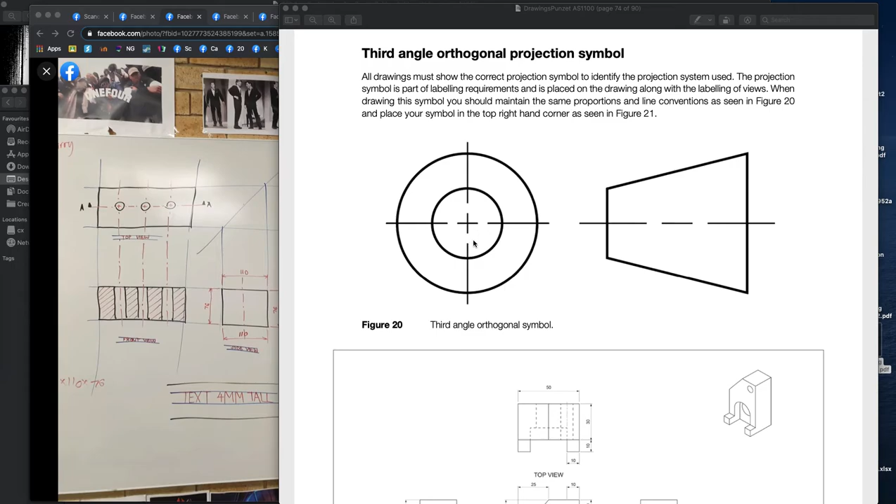First thing I wanted to talk about is the third angle projection symbol, which looks like this. Like I said, I consider this a target and a flag. The actual idea is it's a cone shown, and to show that it's a cone, we have to include these lines here. We're going to talk about those lines in a second. They're called center lines, which I guess brings us back to line weights. And there are two line weights. There's thick dark and thin dark lines.

We might draw lines initially as what we call construction lines. They should be drawn with a 2H pencil. Now, when I was going through high school and uni, I always just used the same mechanical pencil for all my drawings. I was lazy, and I never used a sharpened HB, and I never used a sharpened 2H. If I wanted to draw a construction line, like my working out lines, my lines that I'm going to use to start off with, I would just draw very lightly on the paper.

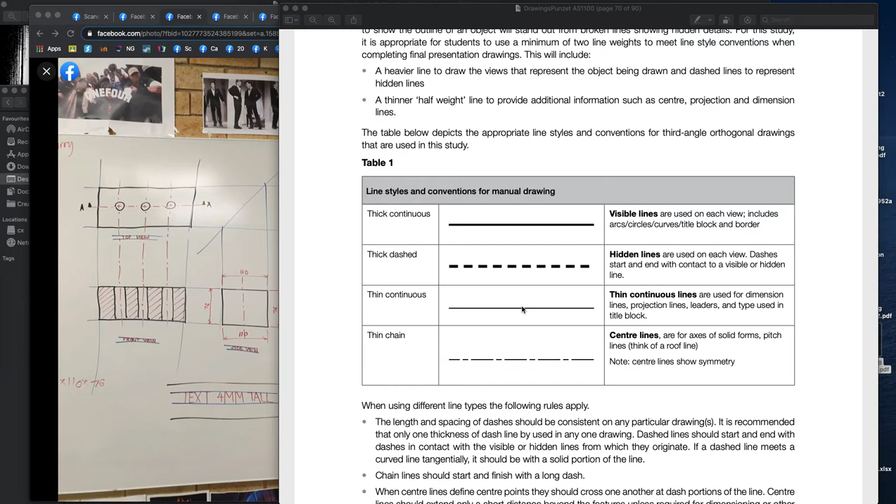And if I wanted a thin line, I would hold my pencil at a very steep angle, like a 45-degree angle or lower, and just use the corner of the mechanical pencil. And if I wanted a thick dark line, I'd hold the pencil flat. So you can see this drawing here shows the difference: holding the pencil flat, we get the full 0.5 millimeter. Whereas if we hold it on the side, initially we're going to get a very thin line, but as time goes on, we'll get a wide line. So just looking at your pencil and seeing how the graphite is moving away was how I controlled it without having to use multiple pencils.

The official thing that I recommended in the previous video is that where I've drawn blue lines here, my very light lines, that should be done with a 2H pencil that should be sharpened. The thick dark lines that I've shown here in black should be done with a mechanical pencil that's 0.5. Now, I did look in the Australian Standard. I can't find anything that specifies 0.5. I will just tell you that that's what I was taught, and I don't think you're going to go wrong in the HSC if you use 0.5.

Then you're going to have to use thin dark lines, and you're going to use thin dark lines for things like center lines, for dimensioning, and for hatching or sectioning, which you can see there. And in this drawing, I've used red. For that, you should be using a sharpened HB pencil, or if you're like me, you can just use the edge of your mechanical pencil.

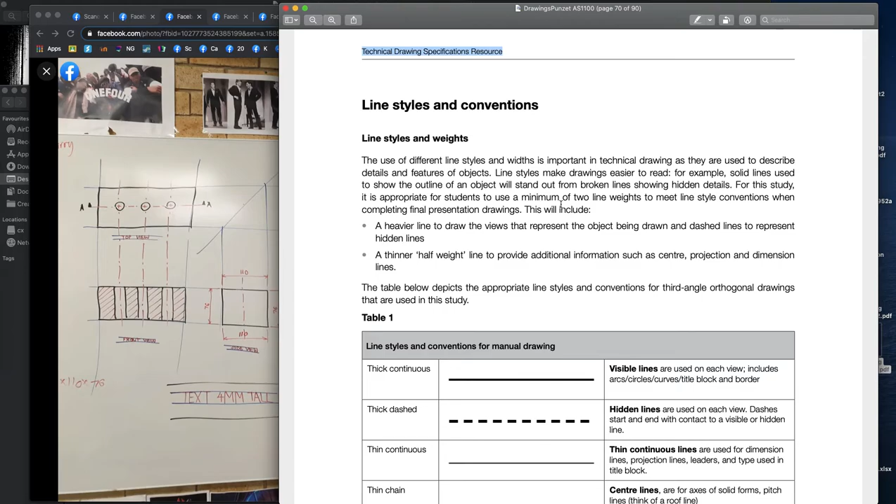So let's go back to the standard. Now, this is the VCE, the Victorian equivalent of the HSC. Their document, anyway, is a pretty good document, and they talk about 4 different line types. The thick dark lines, which you can see here, I've drawn as a black line on the whiteboard. The thick dashed lines. Now, I don't have any thick dashed lines there, hidden detail, but if I was drawing hidden detail, it would be in the same black line.

Then we've got thin continuous, which is used for dimension lines, which you can see I've done in red, and also for section lines and for sectioning and hatching. And then we have the thin chain. The thin chain is what we use for center lines. So that's a long dash, short dash, long dash, short dash. And what that does is it shows that something is circular or cylindrical.

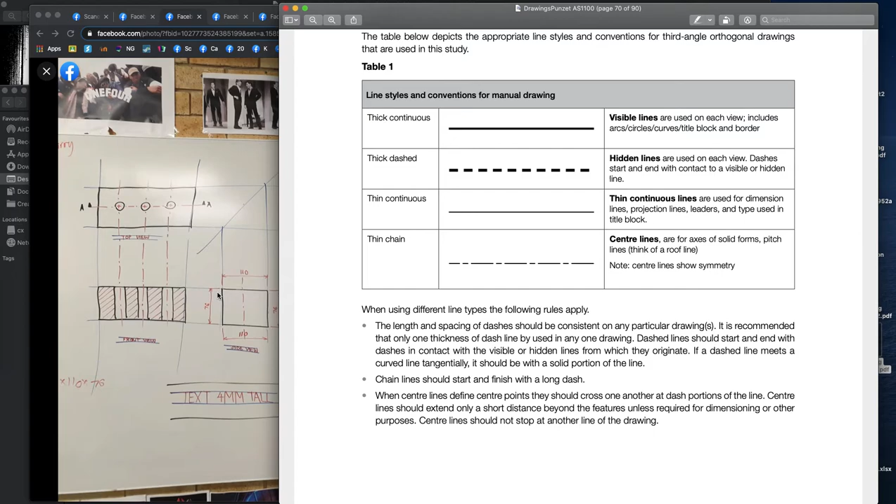So we use that a lot so that when we look at this sideways, we don't think that it's a rectangular shape. We show that it's cylindrical by having a center line on it. And that's how we indicate that in our drawings. And that's very important. Maybe not in the HSC, but you'll definitely lose marks with me if you don't include center lines.

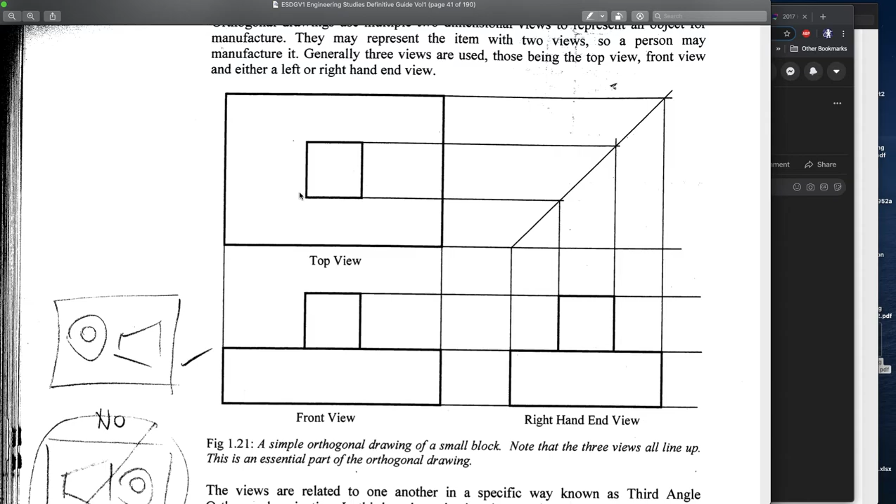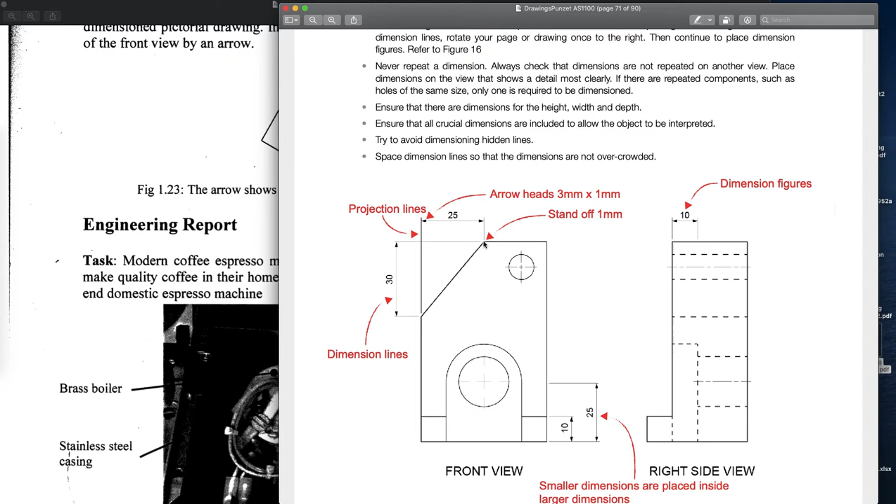Now, the reality is it's hard to draw a solid shape on paper when we're drawing with pencil. So instead we just draw the outside. We don't fill in the arrow. There's also what we call the standoff, the gap between the dimension line and the object. That should be 1 millimeter. And then we also have little lines that extend past, and I think they should be 2 millimeters past the dimension.

The other thing that is really important is that when we're drawing our dimensions, the dimensions are always written above the line and to the left. Can you see how this is written above the line and to the left of the line? And this one is also written above the line and to the left. A lot of people want to write the dimension here, but if you write the 10 here, it could be confusing as to whether the 10 is here or here, especially if you're reading on a wet day, you're running late, people are running out of money and very cranky. It can be very easy to make those sorts of mistakes.

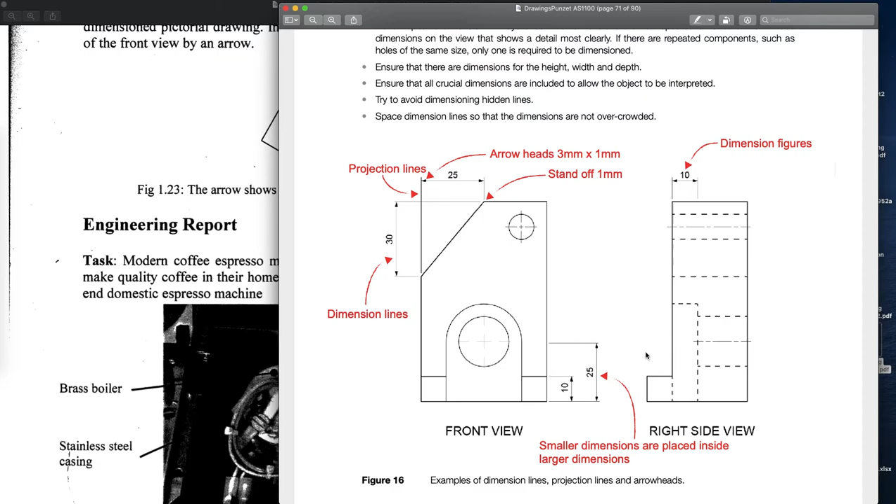This is really critical for the drawings that you do for me in your civil engineering report at the end of the year: it's important that you round off to the nearest millimeter. Unless you are specifying something with greater accuracy, like a space shuttle where you've got a tolerance of 1/10 of a millimeter, we always show all dimensions in whole millimeters. Unless we specify otherwise, all dimensions are in millimeters, never meters or centimeters or anything else.

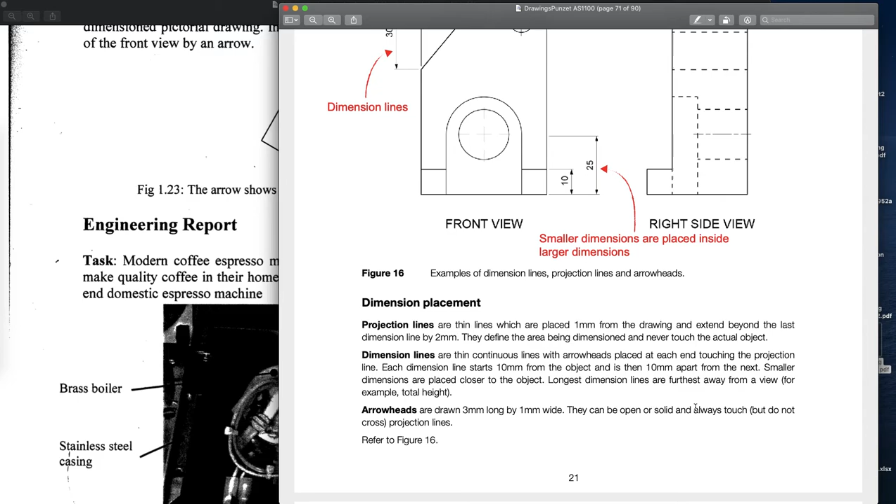Okay. So the arrowheads can be open or solid, and always touch but do not cross the projection lines. These lines here are called the projection lines. In other videos, I've talked about how engineers in actual practice might be lazier when drawing sketches, but this is for official drawings and this is the standard you should be working to.

For circles, it's a little bit more complicated, but here we can see the hidden detail lines are thick, dark, dashed lines. That shows the viewer that there's a recess here, and then a circle running through that space. We can tell this area is circular because it's got a center line, a thin dark chain line, long, short, long, short. That shows us that this is circular and not a rectangular cutout.

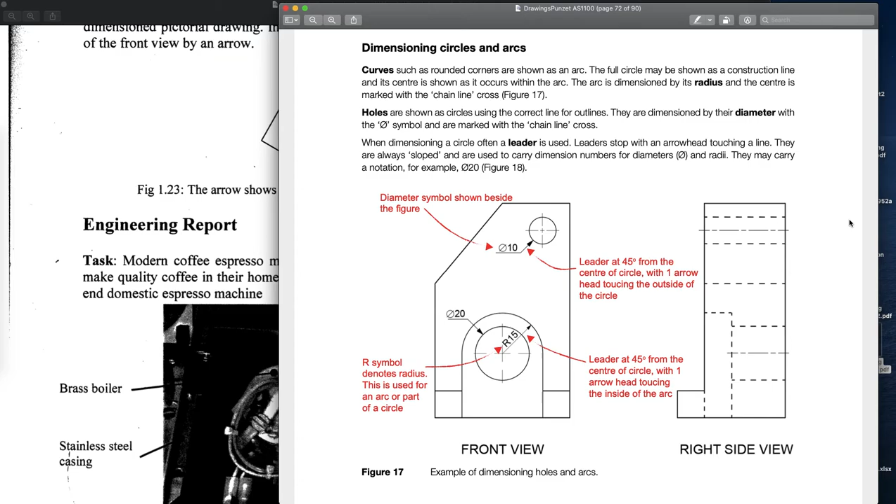Okay, so I'm not going to go into dimensioning of circles at the moment. I'm going to move this and go to some drawings. Here we have some drawings. What I'm showing here is don't ever write your dimensions on this side of the line. That would not be to the left. Like Beyonce says, to the left, all of your dimensions to the left of the line. You can see that in this shape here, I've written above the line in both cases and to the left of the line.

Okay, so I was saying how engineers often draw their arrows just as a slash at 45 degrees. Yes, you can do that if you're an engineer doing a quick sketch and handing it over to someone else to draft officially, but you would not be allowed to use that when handing over formal drawings to your client.

Your formal drawings will have to be done as a correct arrow, which is 3 and then 1 millimeter wide. It's important to remember that.

So how a lot of people draw this is they start at where the dimension line meets the projection line, and then they draw out. And by drawing out, they often get a curve that goes this way, and that's probably more correct. If you had to take a guess, a lot of people, when they start learning, they draw like this, and that's probably not ideal. You're better off taking it in from where they meet and then taking it out.

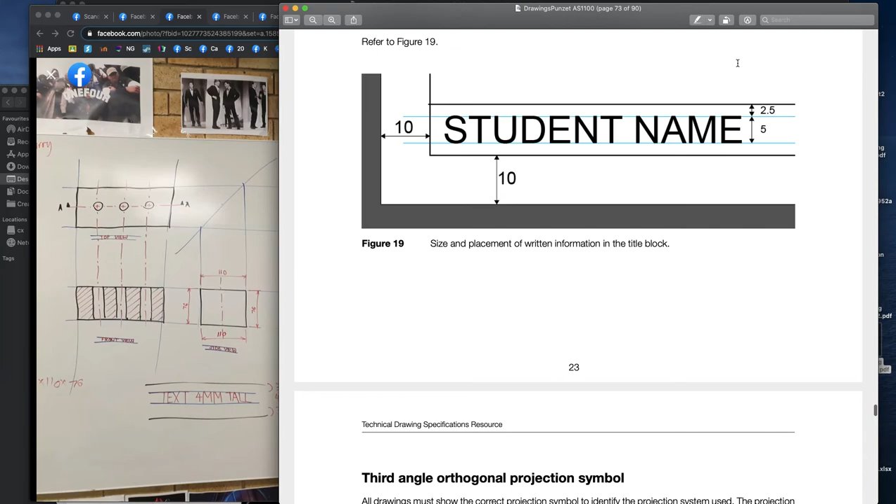So the AS1100 does specify text. If you can see here, the VCE says that your title blocks should be 5 millimeters tall, and I agree with that. We'll have a look at that in the AS1100.

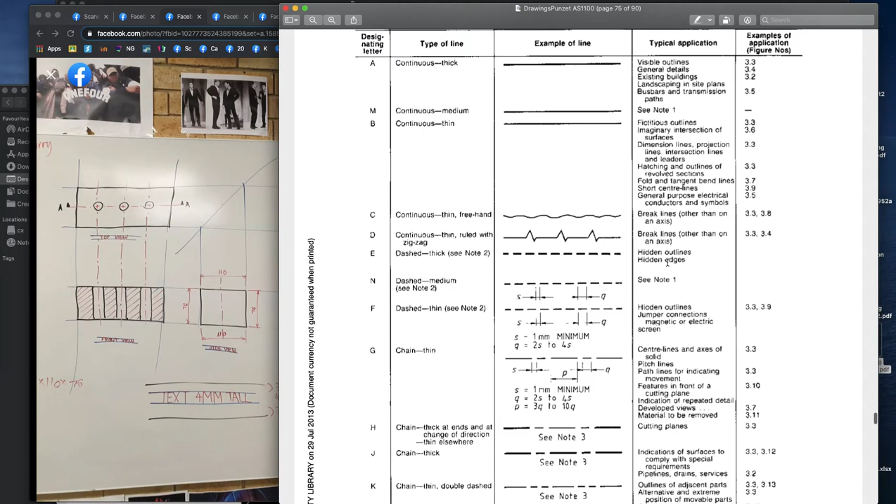We've now switched over to the AS1100, and it specifies different line types and where they should be used, and it shows how you should draw your thin dark lines, your dashed lines, and your chains. They specify minimums so that the spacing should be at least 1 millimeter, and your thin dash should actually be more than a dot. Sometimes I just draw a dot, and you shouldn't. It really should be 2 millimeters. But anyway, we're going to go on.

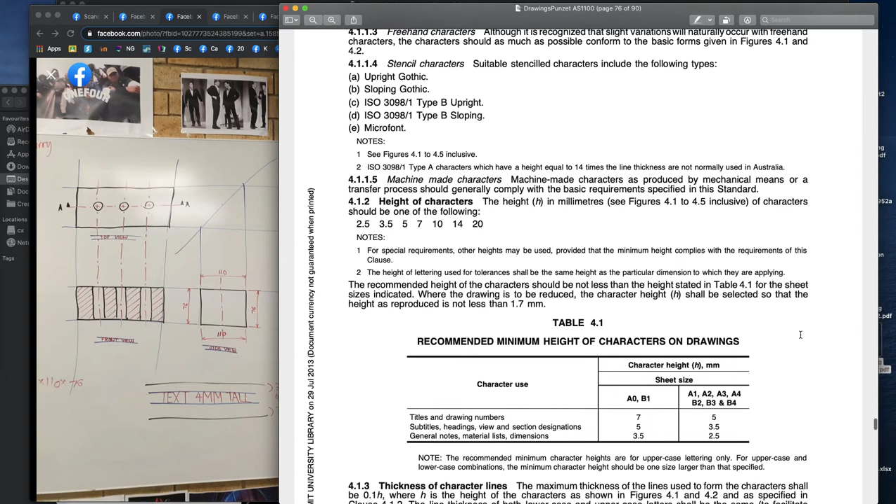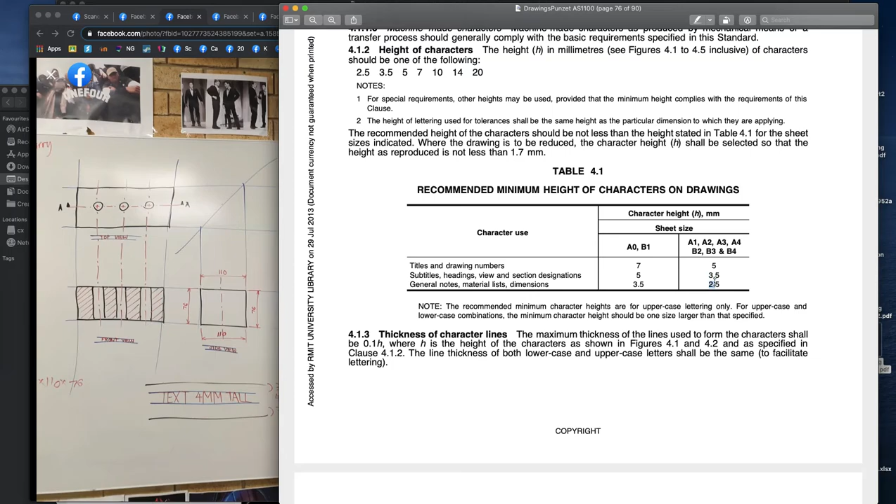The sizes of your text: if you're drawing on an A4 piece of paper, your titles should be 5 millimeters. Your subtitles should be 3.5 millimeters, and your general notes, materials lists and dimensions should be 2.5 millimeters. So that's the AS1100 for sizes. That said, if you did everything to 4 millimeters, I'm going to give that to you correct in the HSC. I think it's better to know what the right thing is, and then you can ignore it.

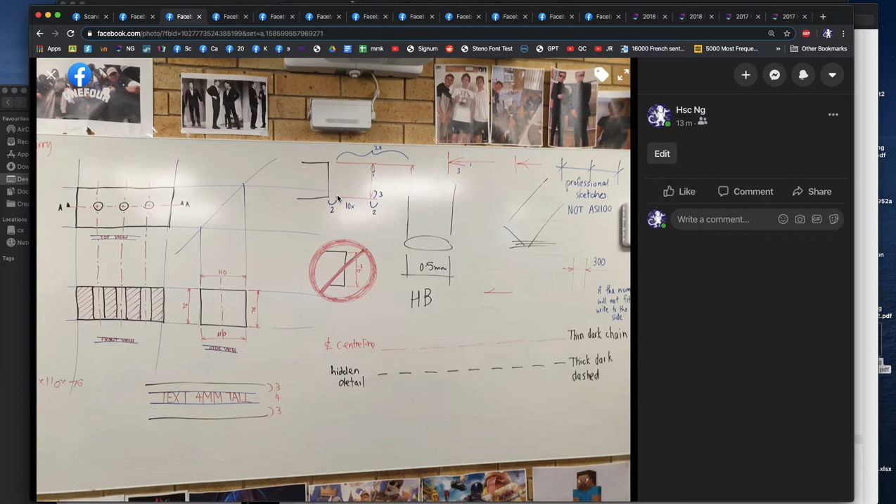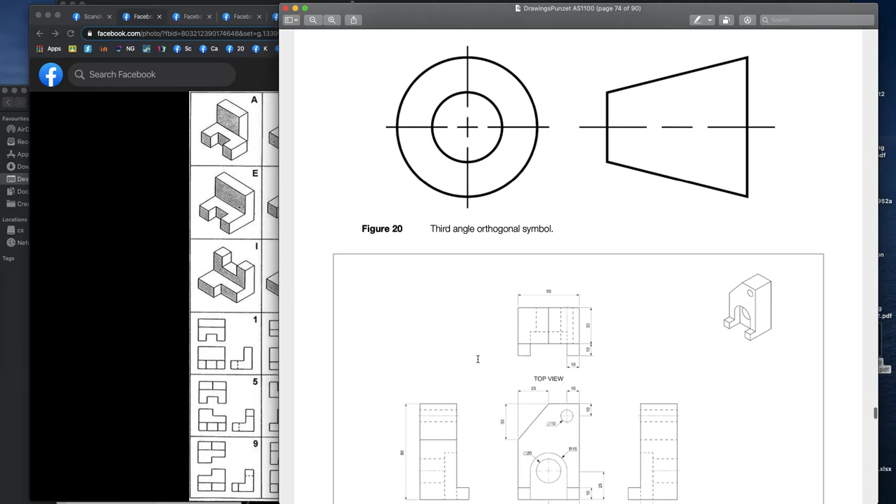Okay, so now that we've talked about hidden detail, we can go back up to here and look at this document. Okay, so we've talked about dimensioning. So the next thing to talk about is, do we want to, yeah, okay. I'll talk about circles in a second.

While we're talking about hidden detail, we can see the importance of hidden detail and being able to identify our drawings here. So if I ask you to find match 1, where does 1 match to? Well, we said earlier that that was E. And we can see how there's hidden detail: when we look through the side, we can't actually see that this goes in. But in order to indicate that to people, we can use hidden detail.

Now, as we go on, we're going to use hidden detail less and less, and I'll talk about that in a little bit more detail later, a little bit of a detail pun for you. But the idea is that instead we'll use something called sectioning. And sectioning is imagining that you just cut away part of the shape and you show them what it looks like when you cut away part of the shape.

We'll go back to, well, did I delete that picture? Did I close that picture? I maybe want to keep that. Yeah, I'm going to keep that. Okay.

Okay. So just to pick something interesting, let's go through just 2. Which one is 2? Can you guys match up where 2 lines up with? Well, when we look at 2 from the top view, we can see that it's going to be 2 steps long from the left, but it doesn't go. It's B, D. D looks okay. The problem with D is that it's on the wrong side. H looks good. Yep, H is good.

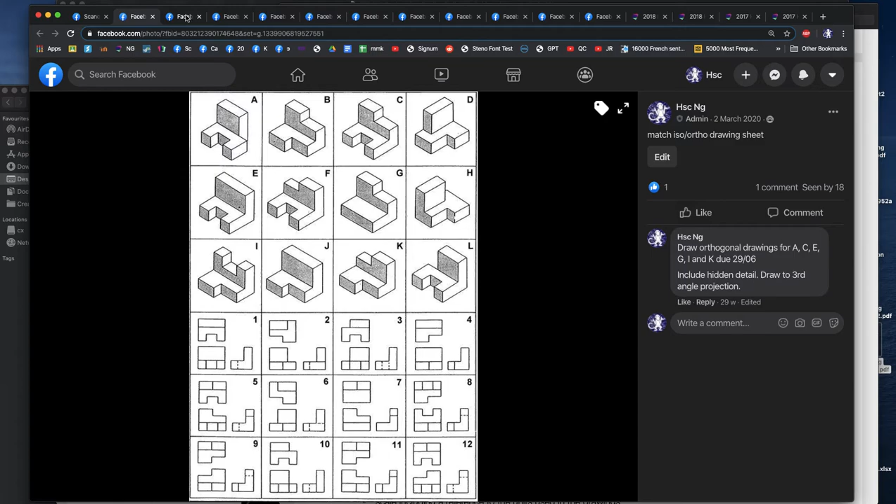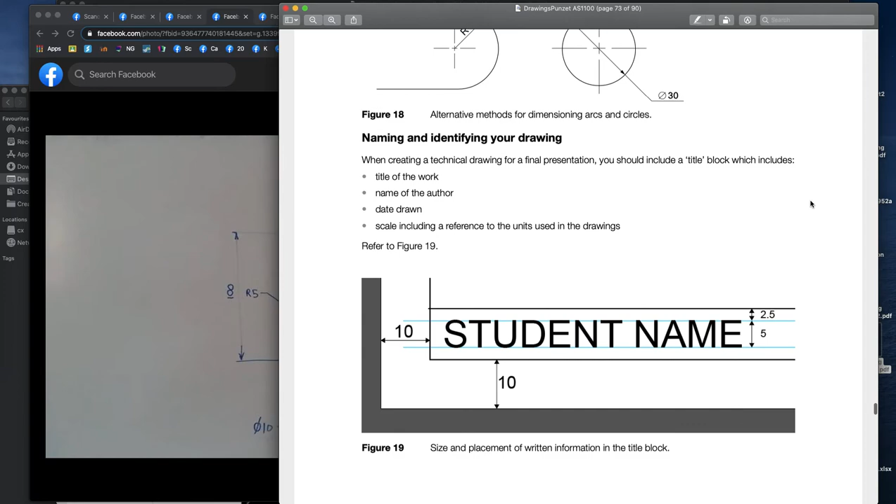So this is specified on page 20. Oh, I said 20. It's actually on page 23 of the VCE document. And you can see different ways of specifying dimensions. All good? You notice that one actually looked like it was at 45 degrees, but anyway. Page 23, I'm going to edit that. And all dimensioning is also specified on page 95 of the Australian Standard, which

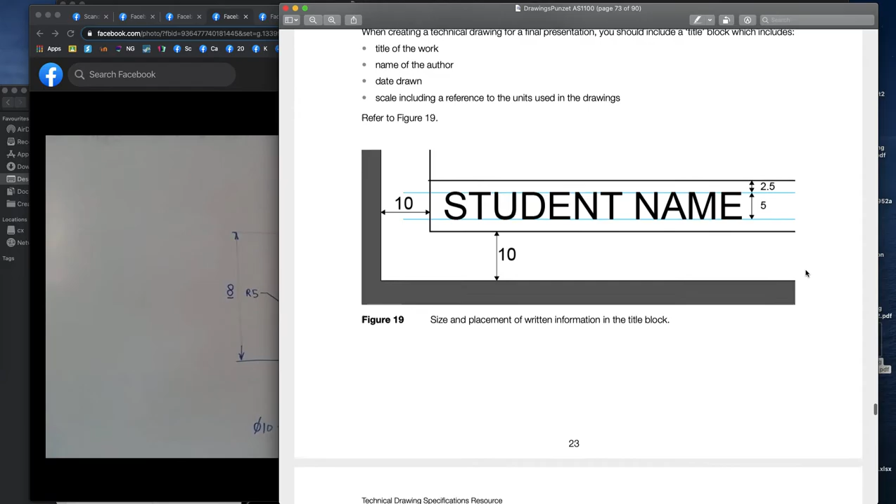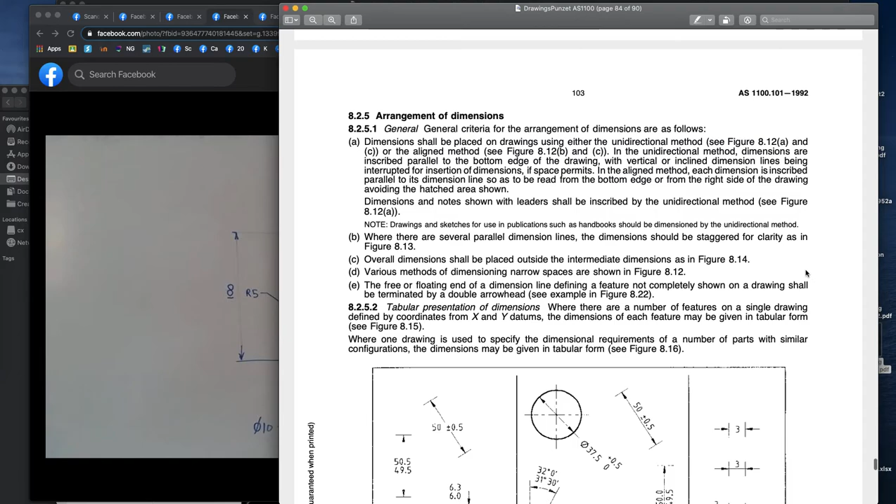so for circles, this is where it's specified in the Australian Standards. They have some other stuff. So from page 95 on. You can see I've obviously not photocopied the whole thing, I'm not allowed to photocopy the whole thing, but I've taken the parts I think are important.

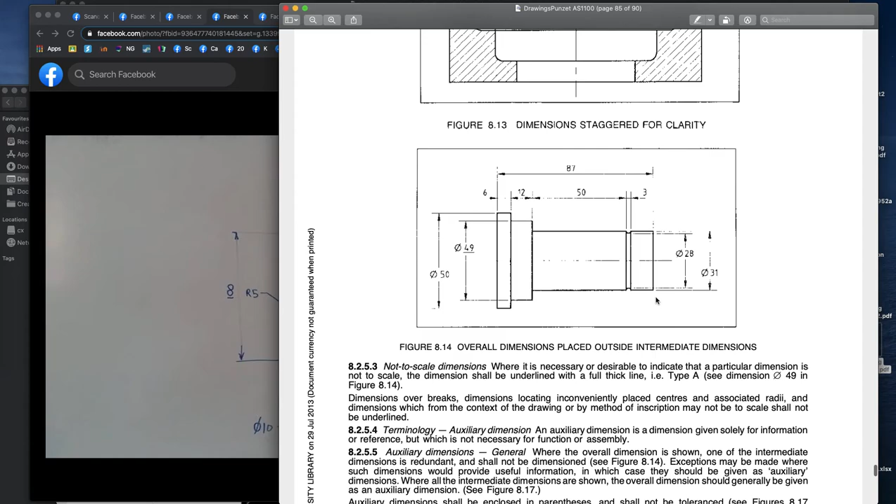So here we can see nested dimensions, and there's the diameter sign. Here are some more examples where they've shown some more details. It's important that we include the center line so that we can see things. And here's some more dimensions. Okay, so we can close that. We've done that now.

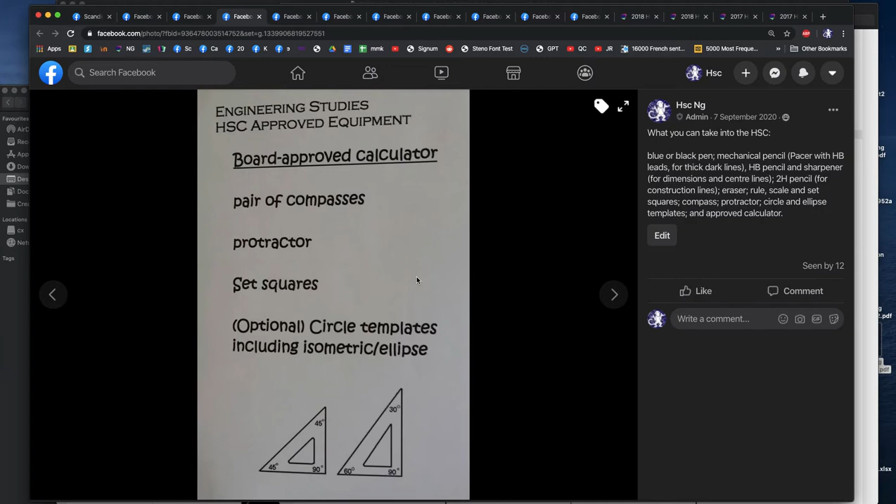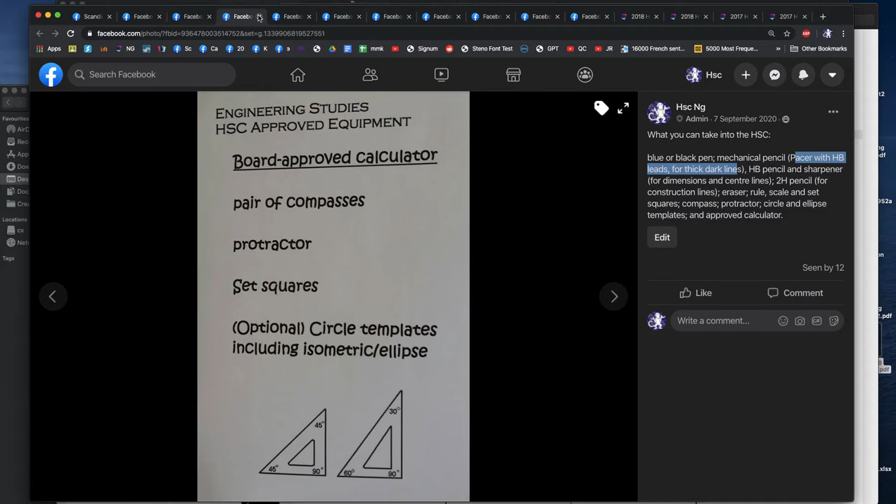Okay, what you're allowed to bring: a pair of compasses, a protractor, set squares, circle templates, including isometric or ellipse templates. We've talked about that. We've talked about why we want to use HB pencils and sharpeners for our thin dark lines, for our dimension and center lines. We want to use a pacer with HB leads for our thick dark lines and for our hidden detail. We want to use a 2H for our construction lines. And if you watch my toaster video, you'll get that.

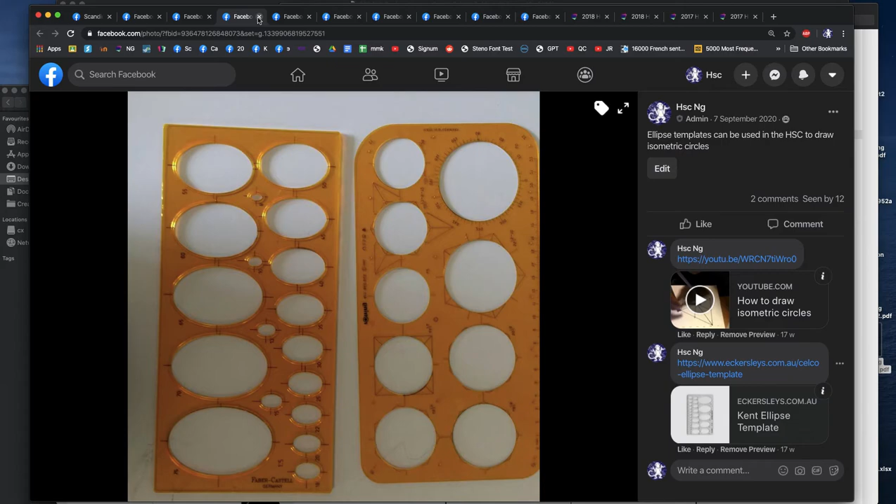Okay, so the next thing to talk about is threads. We don't go into a whole lot of detail on threads in year 11 normally, but in the past I used to say if it's not in the Copeland textbook, it won't be in a test. These days I feel as though I don't have enough good questions in the year 11 textbook to test higher students. So I am now including a little bit more detail. So even things up to reactions and maybe even some introductory trusses, some things like that. Not relevant to this video.

Anyway, the point is that we don't draw threads like they look in real life. You might say, why not? That looks a good drawing. It's really, really hard to draw that. It would be very time consuming to draw that. So we don't draw this. We don't draw a thread that looks like a real bolt.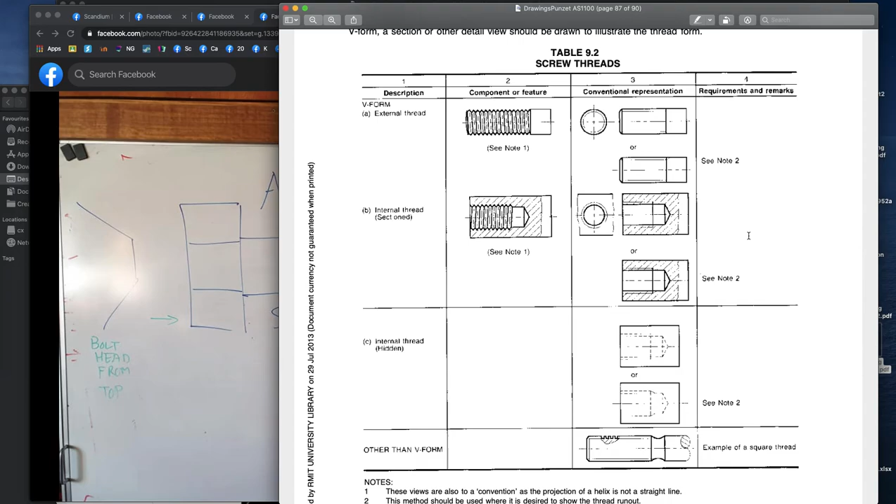Now, the distances here, that's something we go into a lot of detail on later, where we learn about coarse and fine threads. And we're going to go into a lot of details later. But for the moment, I want to give you the very basics, right? Now, when we're drawing the bolt, so this is the bolt.

If we looked at the bolt from the head, it would just look like a hexagon, right? That makes sense. Whereas if you look at it from the bolt side, how we draw that is we draw that with the broken line on the inside. Now, how I like to think of this is the broken line only goes where there's metal, right?

So because the bolt is made out of metal, what we did is initially we had a bolt and then we cleared the bolt and then we cut through here with a die, and then the die cut away and shaved off metal. And so this is the line of where we've cut away metal. If we're drawing the bolt, that's how we draw the bolt.

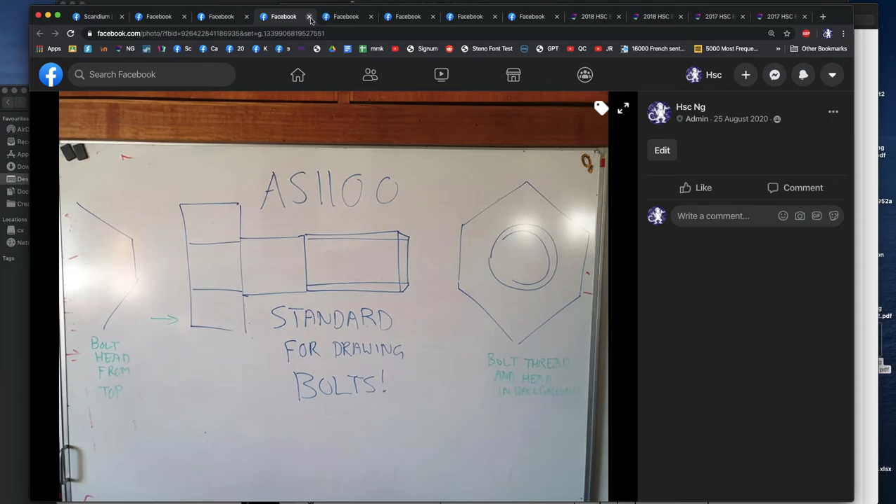If we're drawing a nut, so the nut goes on the bolt. Well, in this case, if we're looking at the nut, what we're going to see is the broken circle is going to be on the outside. And the reason the broken circle is going to be on the outside is because that's where there's metal. If this area is empty, there's nothing here.

So the broken circle goes on the outside because we use something called a tap to cut through the inside thread. We tap the nut is how I remember that, like Johnny Cage.

Okay, so what we do is we tap the nut to cut the outside out. And this is where the part that we've cut out is. And so that's why we've got a broken circle to say part of that has been cut away. And that's inside the metal. Okay, broken circle, nut outside, bolt inside. Okay, yeah, I guess nutting outside could be, remembering that might help you.

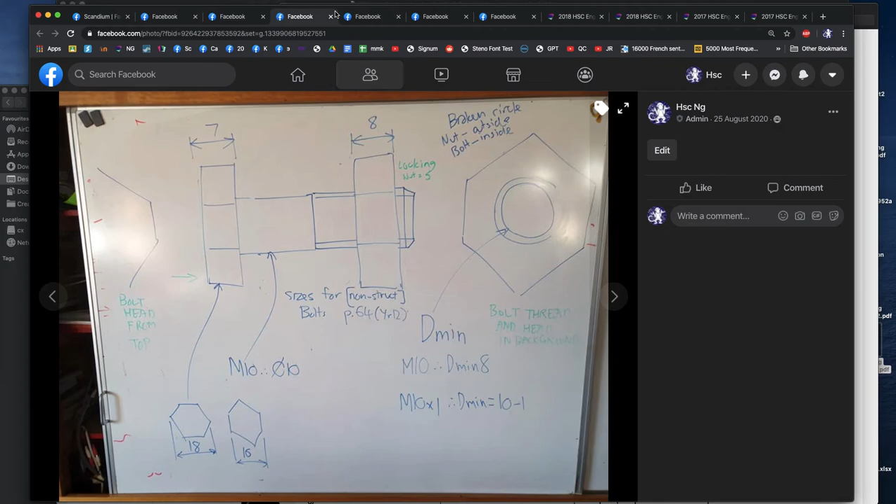Okay, so that's all the detail I want to go into here. There are some dimensions that you will have to learn, and maybe I will get to this by the end of the Year 11 course. You need to know the head of a bolt is 0.7 times the diameter of the bolt. The thickness of the nut... You know what? That's too much for this video. We'll cover that in greater detail later. Okay. This is just the same thing, so I don't need to go into that.

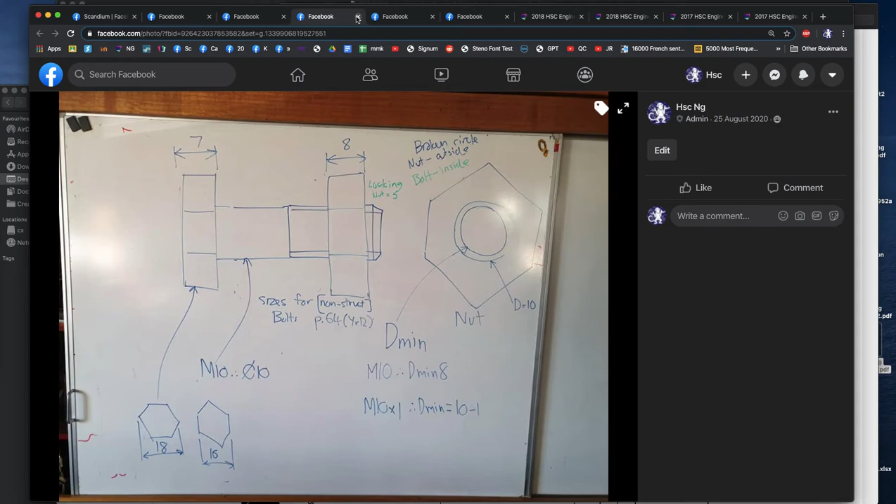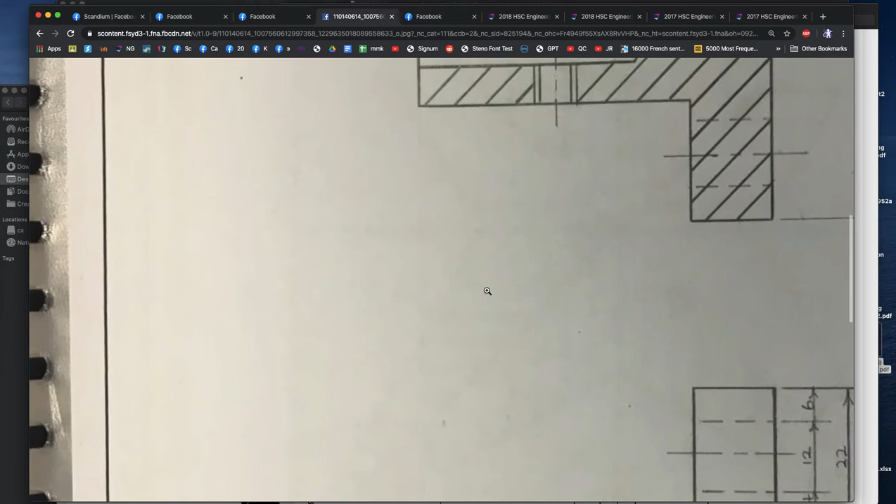Okay, this is a student drawing that demonstrates some good concepts that we want to look at. I wonder if I can just copy image address. I should have done this earlier. Okay, so if we look at this drawing, it is side on, which is not ideal, but let's have a look at how I feel about this drawing.

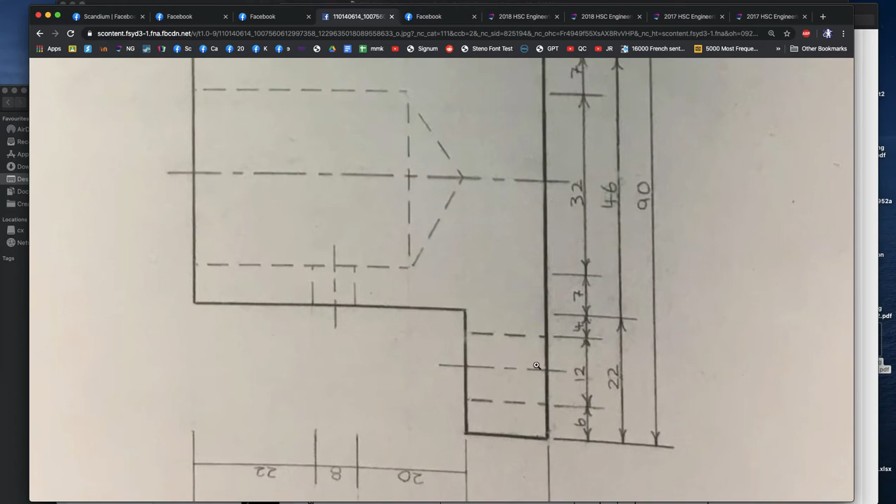So we can see that there's a lot of hidden detail, and there are center lines to show that this hidden detail is circular. Something has been drilled out of that area. That's fine. I'm happy with that hidden detail. The only thing I'd say is that the hidden detail should be a thin, light line as per the Australian standard. That's okay there.

Over here, this is the same drawing, but instead of showing it from the outside and using hidden detail like an X-ray, we're imagining if we just took a saw and cut it in half. And these lines, what we call hatching, or section lines, show the area where the saw has cut through the material. They show us that this area is empty, and that this area here has been cut through by the saw.

Now, what we generally do is we don't combine hidden detail and sectioning and hatching, right? We use instead a process called PCD, pitch circle diameter. I'll go into that in a second. The point is we just generally don't combine the two. We either don't include it at all and show it somewhere else, or we move the interesting parts to fit the part of the drawing we're interested in. And this is called pitch circle diameter, PCD. So they were my two criticisms.

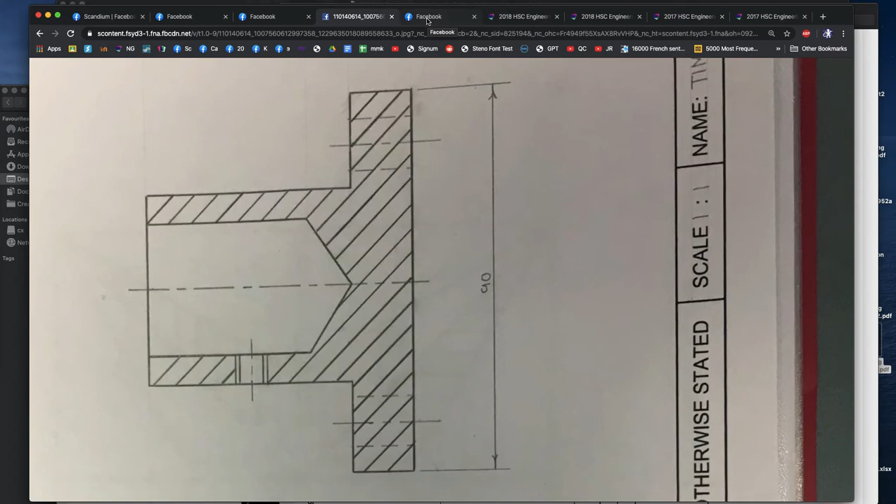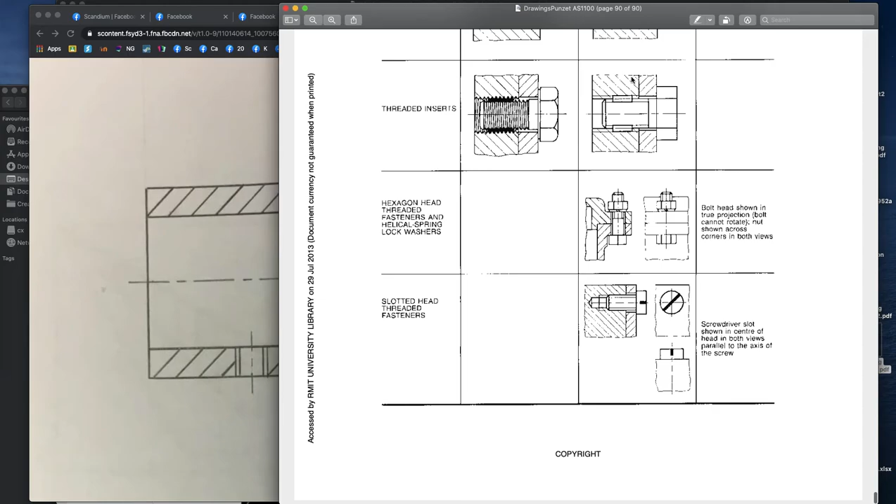The other criticism I have, otherwise a very good drawing, is that the hatching is too dark. This hatching should be light. I went into the Australian Standard to see where that's specified. I can't see it specified, but it's demonstrated in that if I look at this drawing here, I can see that my hatching is lighter. And if we keep going up, I can see that my hatching is lighter. Even though it's not specified in words, the hatching is lighter. So that's not an Australian Standard drawing.

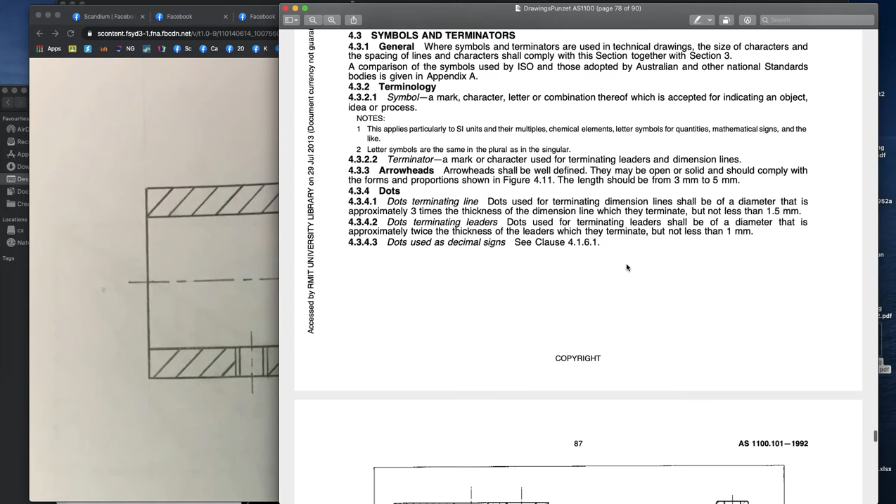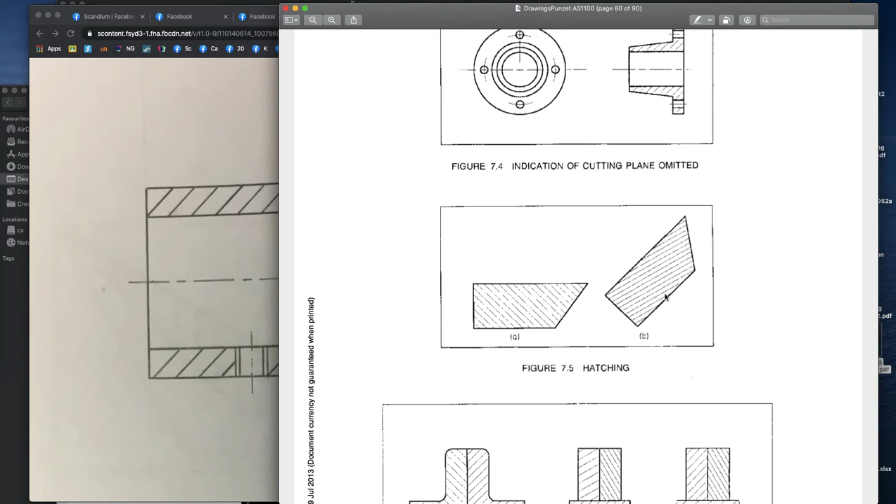So again, we're going to learn about hatching as per the Australian Standard. Again, we can see that it's lighter. Okay, so the idea is that in the Australian Standard, ideally we want to cut through the interesting parts. So if there's a hole, we want to cut through that where it's interesting. The sectioning should usually be at 45 degrees, or if 45 degrees wouldn't be useful, then we're allowed to change the angle, as we can see here.

If we have two materials, we should use alternate hatching. So if we have three materials, this one here is at 45 degrees, this one's at 60 degrees or 30 degrees, and then this one is done at a closer spacing so that we can differentiate that there's three different materials in contact.

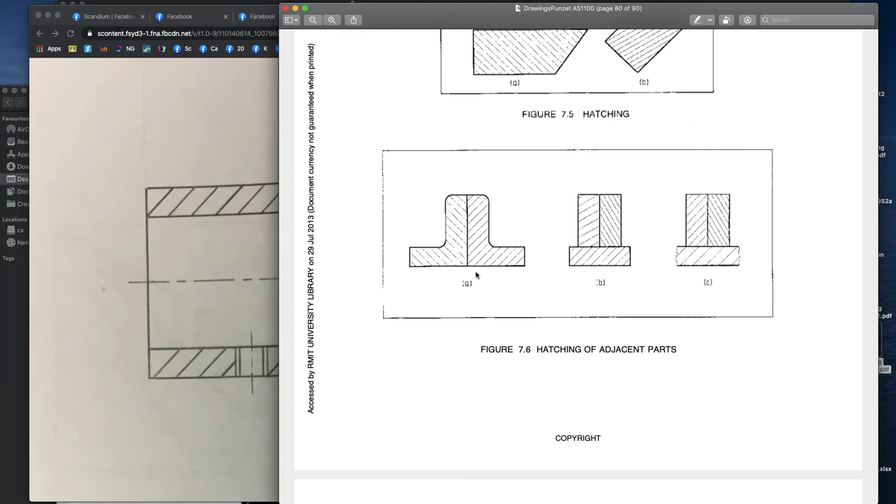I would always specify that you should try and have your spacing wide. I think 10 mil is great spacing, because the wider your spacing, the less you need to do, and we're worried about speed. If you feel as though 10 mil won't show enough information, by all means you can vary it, but 10 is where I'd recommend. Okay, so if we have two different materials, we should change the direction to show two different materials. This is correct, this is incorrect.

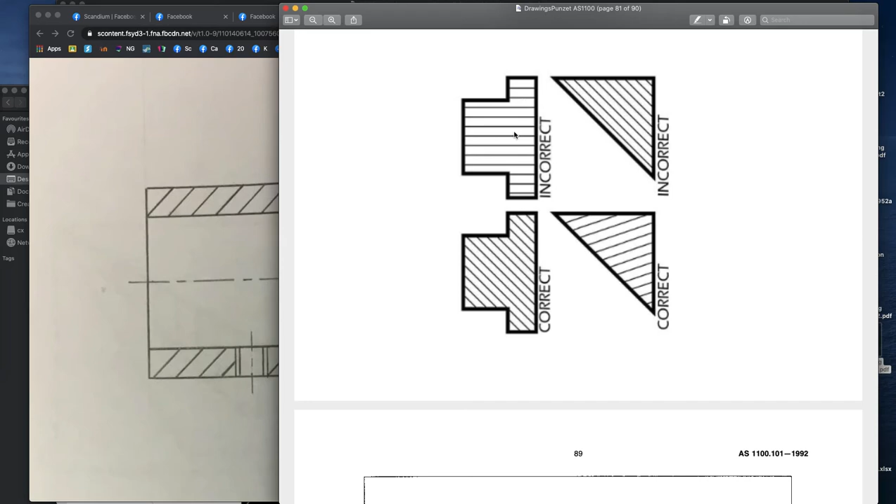So we can see some other things here where, unfortunately, these are on the side. We usually want it 45 degrees, not an angle like that. That's confusing. And we can rotate it where it would be confusing. So this is also incorrect. Now, when I talked about how we always go through the interesting parts, our section should zigzag along the interesting parts. So it's important that they zigzag along the interesting parts.

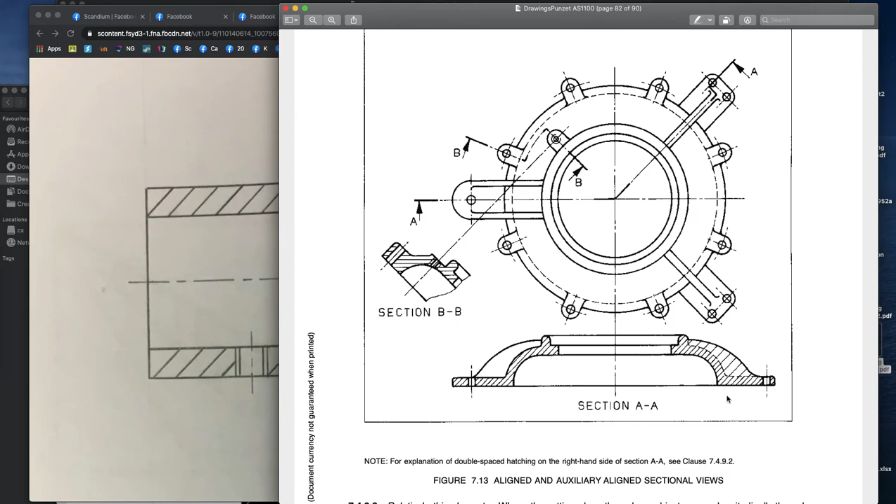Now, you can see here that when we've gone through this section here, it's very thin. That's called a web. And when we have webs or flanges or other small sections, we should differentiate how we show them. So here we can see different kinds of hatching, but generally in the HSC, most people will tell you that we shouldn't hatch it at all. We should just leave it empty. And I'm going to tell you for the HSC, we just don't do it at all.

So here again, we have another interesting shape, and we have ribs that are stiffening the thing, but obviously those ribs are much thinner than the rest of the drawing. So we've gone through the interesting circle, through the rib, through the rib, and then through the circle, so that the resultant looks like this. It looks symmetrical. We didn't hatch the rib. We left that blank so that people will look at that and say, what's going on there? And they'll say, oh, that's only a thin section.

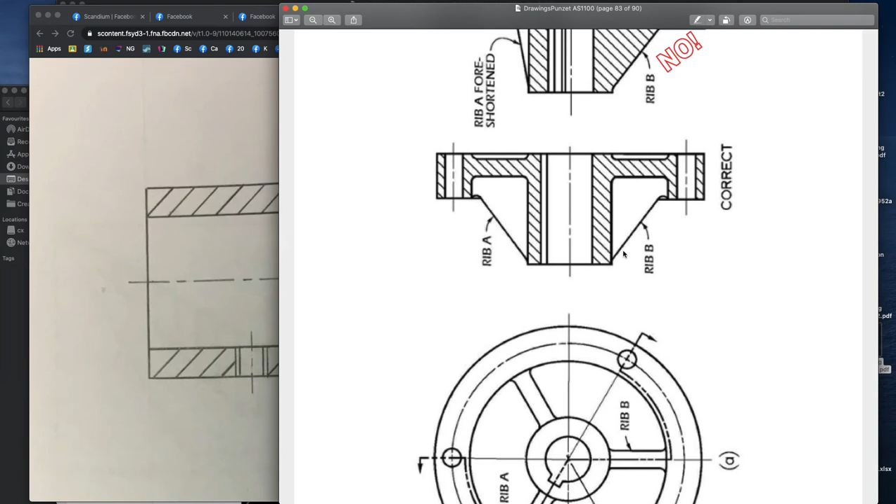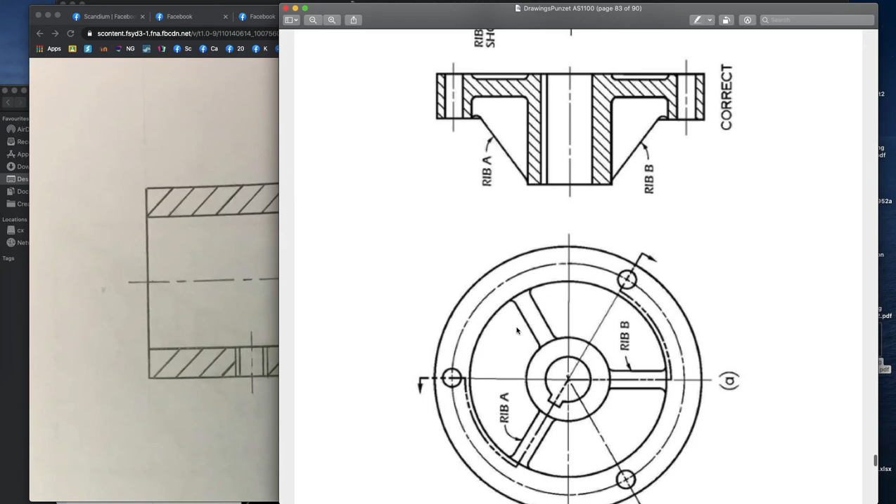And we don't have drawings that look like this. Not only is that way more difficult to draw, but it's also very confusing to read. So don't just literally cut the thing in half, because cutting the thing in half is going to create really difficult drawings for us. We're going to have only a little bit of the rib. Here they've sectioned the rib as though it's a much thicker section. So don't do that. This is bad. Don't do this one, right?

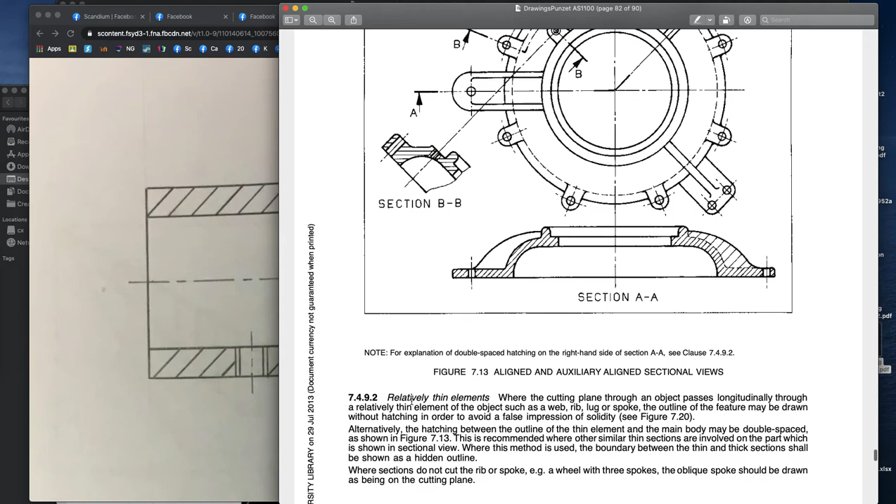And so that is specified in thin sections. Relatively thin elements is where it specifies. Okay, so this is advanced communication. This is getting further to the end of the course, or not to the end of the course, certainly to the end of year 11.

And then, so this is another example of, I don't know if this was a HSC question. I think this might have been a trial question on PCD. The idea that if they tell us to section this thing, even though the section line cuts through A, the fact that they've said above PCD, pitch circle diameter, means that you should rotate this circle along. Because they wrote those three letters PCD, it means rotate that circle along.

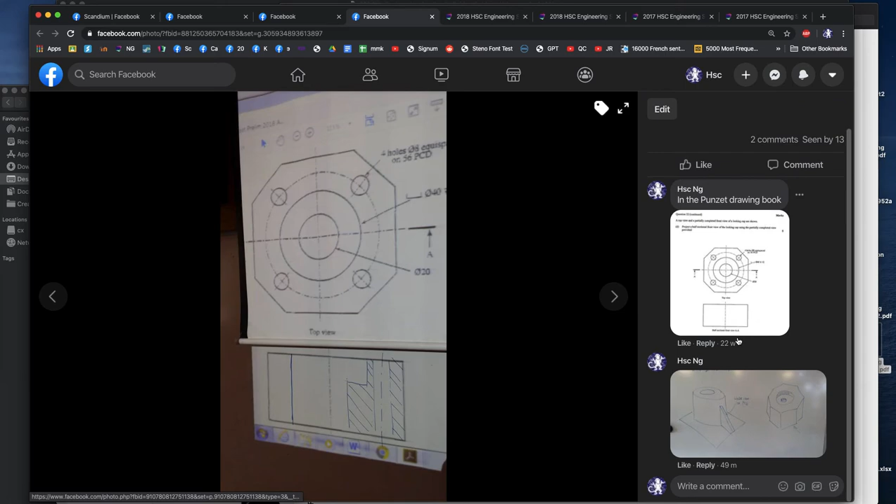It also has this symbol here, a spot face. A spot face just means that the area is sunken. And we also talked about how webs can be PCD. In addition to circles being PCD, webs can be PCD. So that's some notes there.

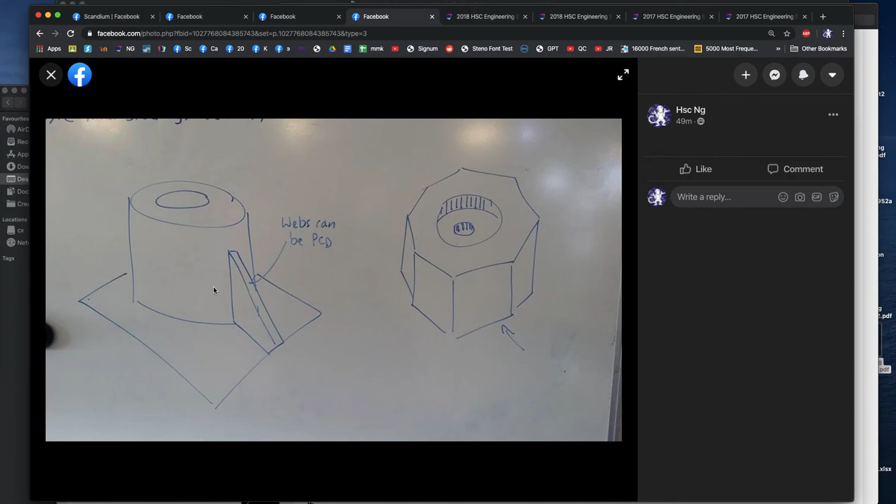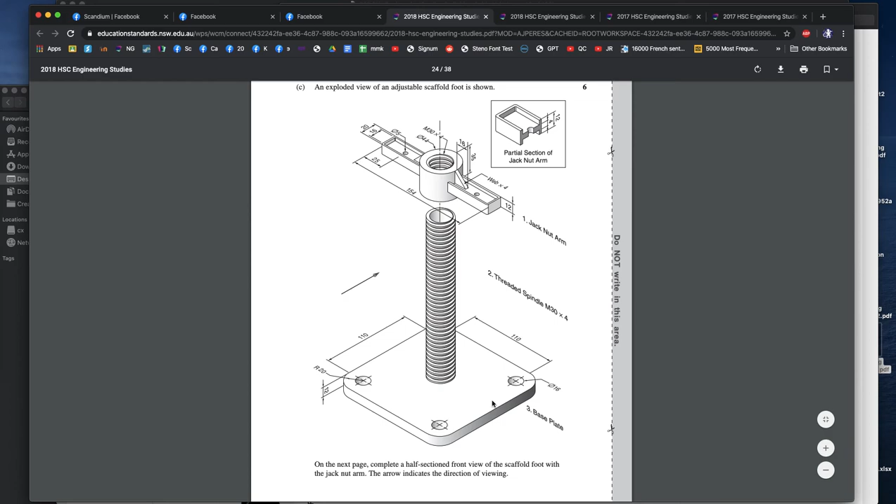Okay, this is the big finale, right? So I said that often there have been 6-mark questions on drawings. This is a drawing from 2018, and I have the 2017 question as well. So what they've said is, we want you to draw this drawing. We want you to do a half section, which means we want you to cut away 1/4. And we want you to show us what it would look like if you sawed through 1/4 and just removed 1/4 of the thing. And I'll show you what the answer looks like.

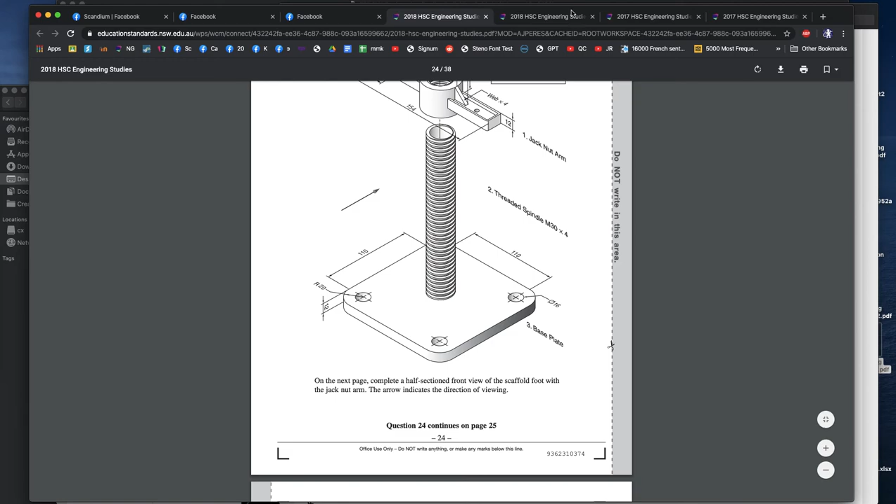It looks like that. Now, the point is that most people would say, but we didn't cut through those holes, right? But because they're the interesting part, we should move them up. Rather than having hidden detail, we should move them up. And so that's what we're looking at here.

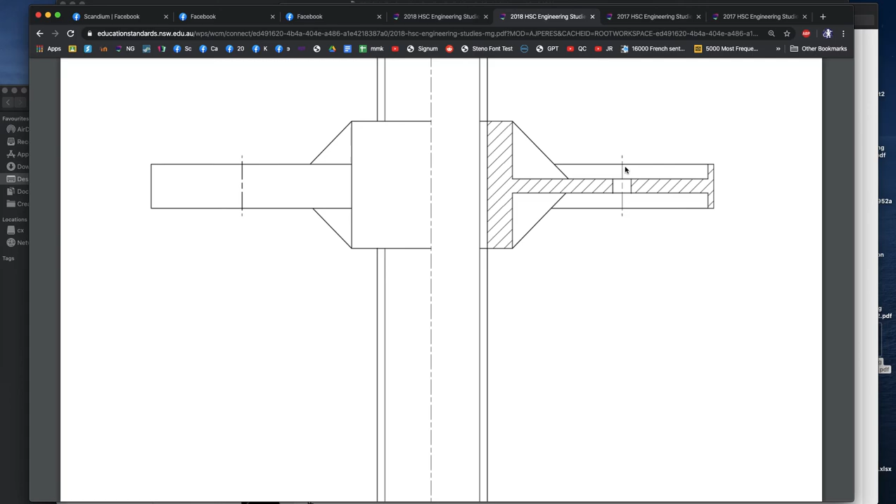I would say that maybe I would make the lines a little bit lighter for the hatching, but it is noticeably different. So that's enough. More than anything, I can see a difference in the line width. The person who's drawn this has at least known that the center lines need to be lighter. So that's the sort of thing that we're drawing, and that's 6 marks of your HSC.

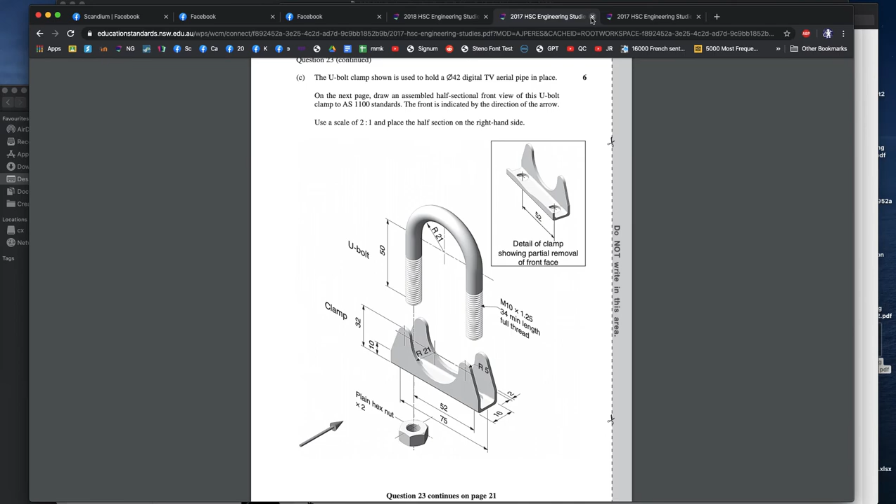They've shown that this is threaded by showing this line here, rather than drawing a zigzag, and there were definitely kids who would have drawn zigzags. That's what we do instead. And if we look at the 2017 question, it looked like this, and the answer was that.

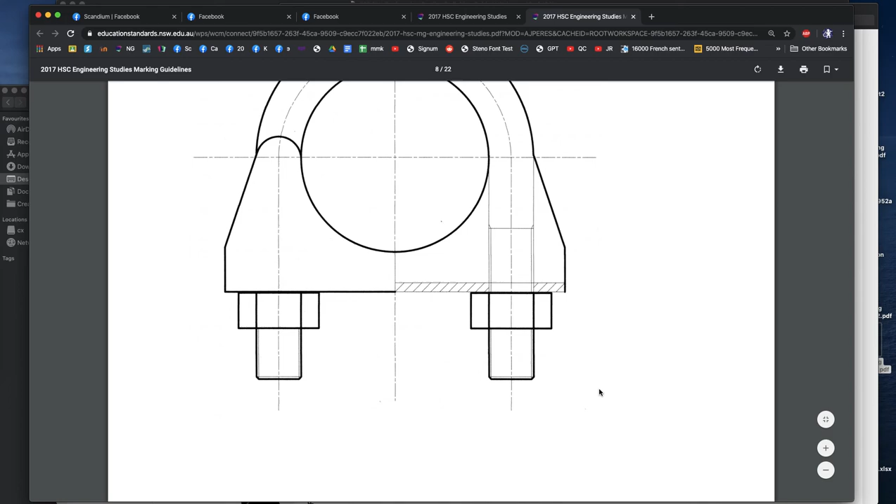Now this one here, I think that their thick dark lines were a little too thick dark. This definitely should have been thick dark, and I think this one should probably have been thick dark, and even this should have been thick dark on the outsides. But it gives you an idea of what is expected for these drawings. And I'm pretty sure that one was also worth 6 marks. Yep, it was. So you would have had, times 1.8, well over 10 minutes to do that question. Okay, so that will do for drawing standards.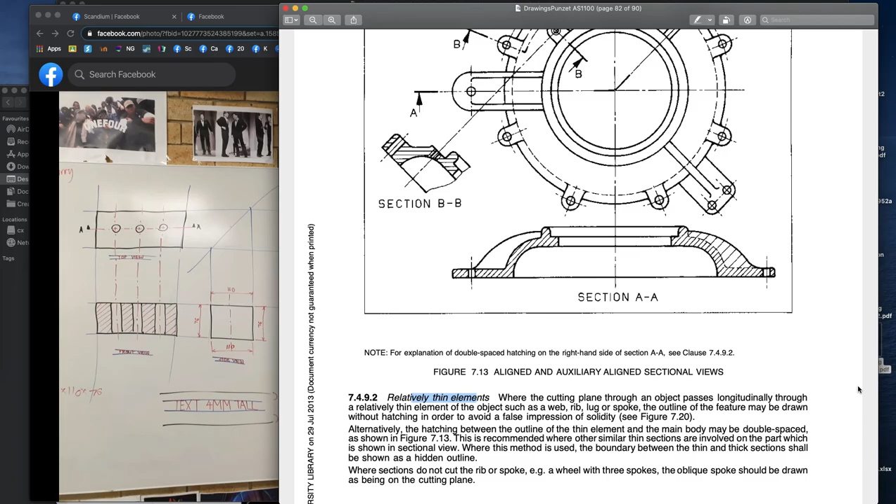The only other thing I'll point out, and there was a question a few years ago, and I was quite embarrassed when I got this wrong, is a cutting plane, the area where we demonstrate the section on our drawing. So where we show there's a section, we draw a line to say, this line here is where we're going to do our cut. So if I call this section AA, then I would draw a line AA. So I'm saying between this point A and that point A, that's my section.

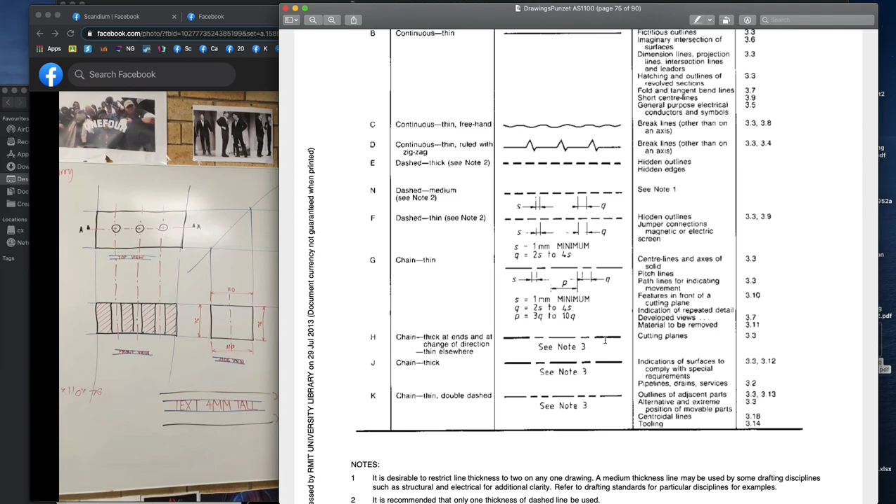This should have thickenings on either side when we draw a cutting plane. They should have thick areas on the outside. And I'll say I was embarrassed that I got that one wrong when I was telling my students at one point last year. But at least we learnt together from that HSC, and we don't make the mistake anymore.

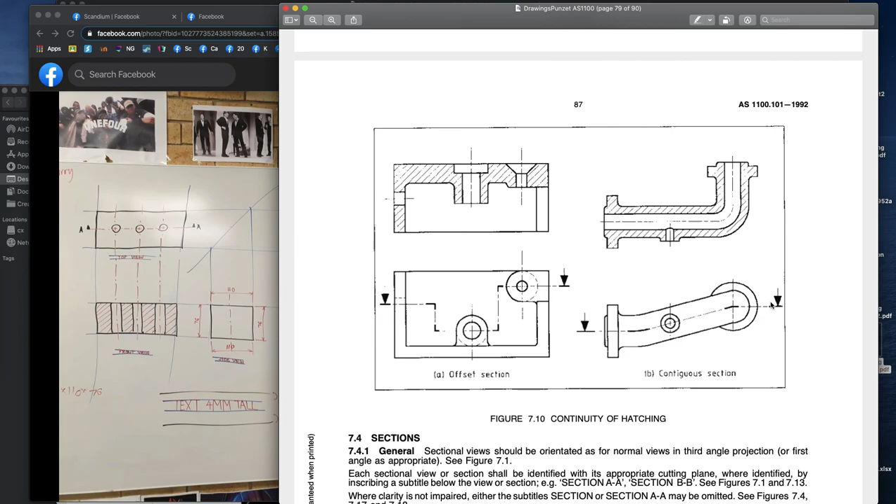If we look here, do you see how we go through the interesting parts? And can you see how we thicken the line? And that's our cutting plane. We can thicken the outside parts. The arrow shows us which direction we're looking at. And here again, we can see our thickened lines, and these are our section lines or our cutting plane. And that's where we're showing where we're cutting through.

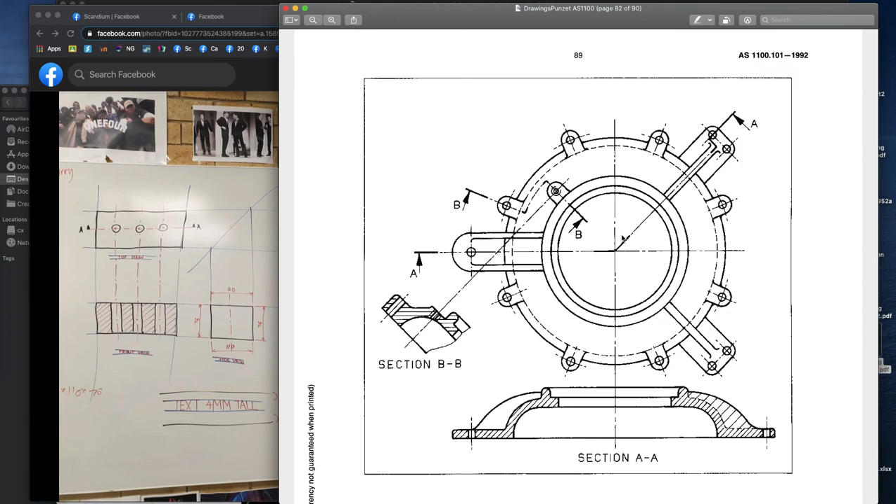So here, do you see how they label this as section AA? It says go from A to A, that's section AA, and this is section BB. And that's a very common way that engineers will specify sections. Okay, we're done.

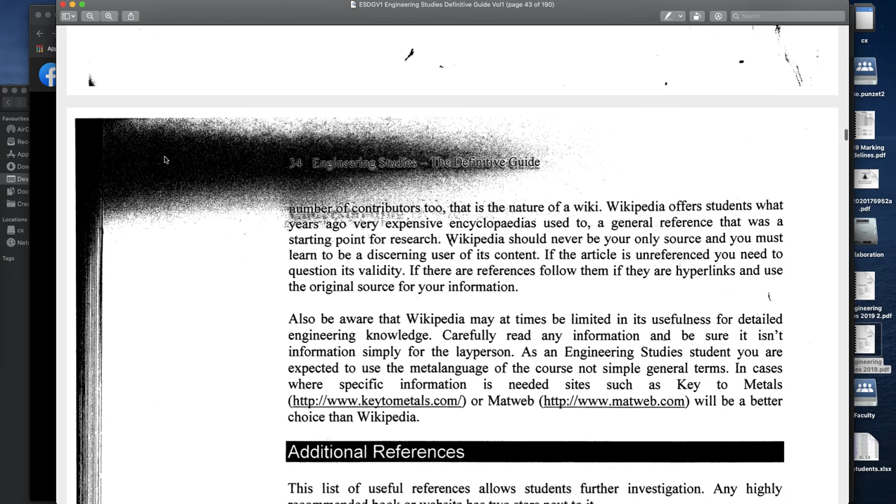I said we're done. I'm just going to quickly say that we will talk about engineering reports, but I'm not going to go through engineering reports in this video. Now we're done for realsies.